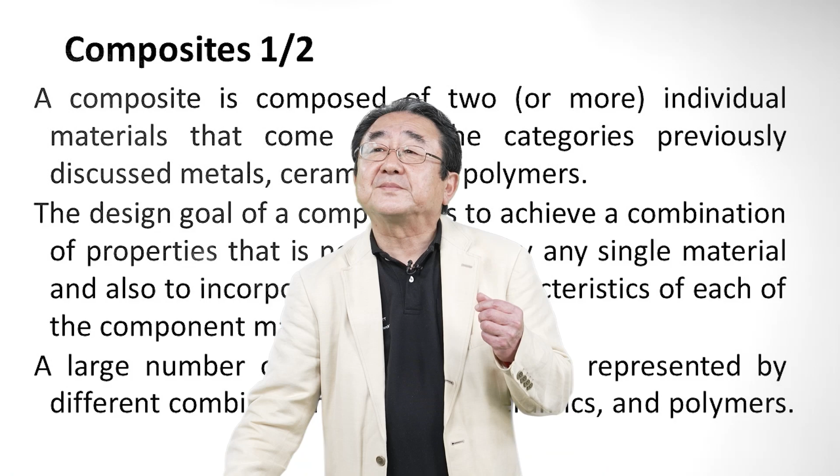So next, I will introduce the composite materials. Composite is composed of two or more individual materials that come from the categories previously discussed: metal, ceramics, and polymers. Composite has two materials mixed together: metal mixed with ceramic and polymers.

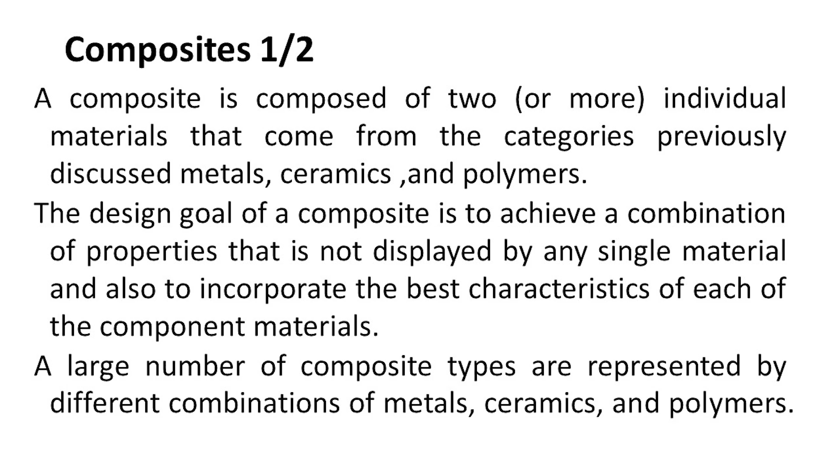The design goal of the composite is to achieve a combination of properties not displayed by any single material. Our goal in designing composite material is to create a new material system, with properties that cannot be realized by using any single material, and also to incorporate the best characteristics of each component material.

A large number of composite types are represented by different combinations of metal, ceramic, and polymer.

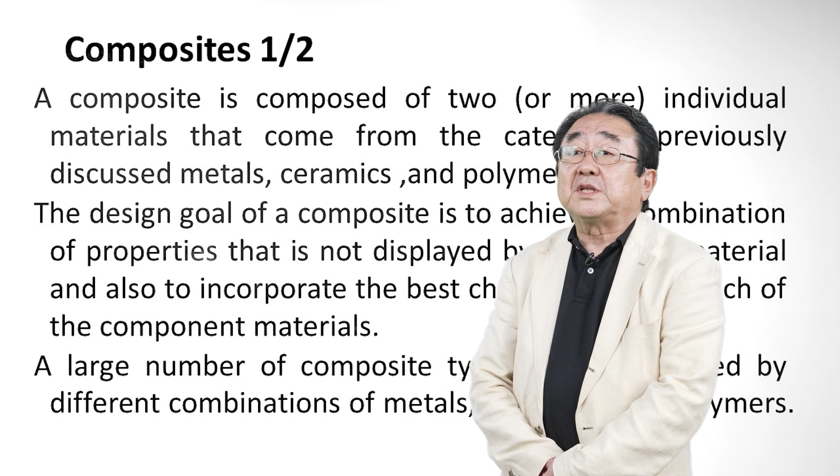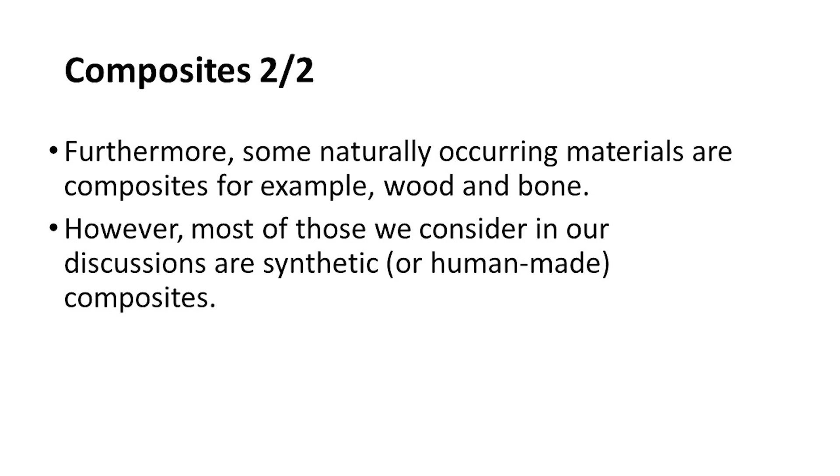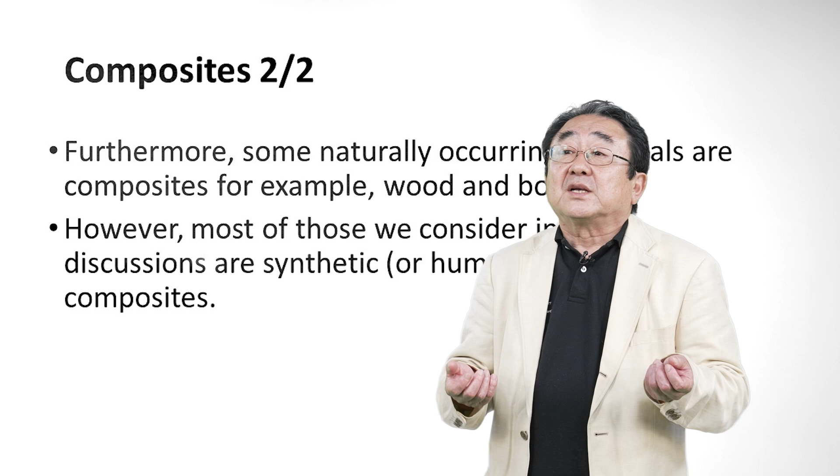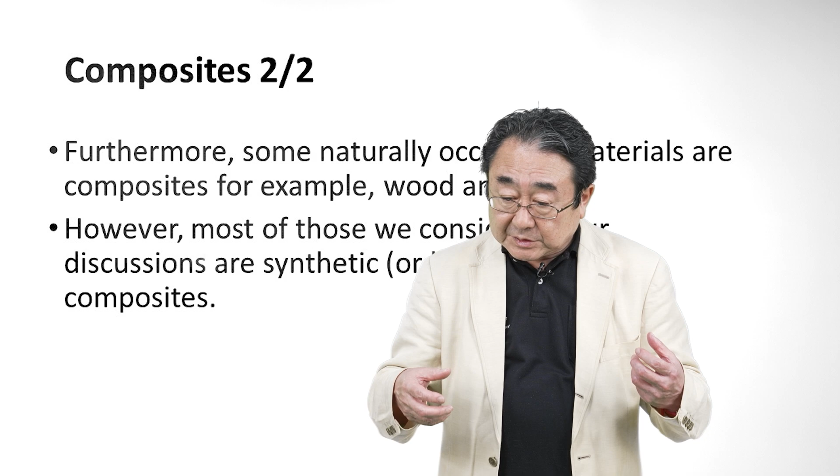Furthermore, some naturally occurring materials are composites, for example wood and bone. Wood and bone can be regarded as composite materials. However, most of those we consider in our discussion are synthetic composites. So in my lecture, I do not explain wood and bone as composite materials. I explain synthetic composite materials, or human-made materials. We can make composite materials, but we cannot make wood and bone - naturally we can only get wood and bone. So my definition of composite materials in this lecture is human-made composite materials.

Among human-made composite materials, there are several types of composite material systems. One is GFRP, glass fiber reinforced plastics. This is one of the most common and familiar composites, fiberglass, in which small glass fibers are embedded within polymeric materials, normally epoxy or polyester. The glass fiber is relatively stiff.

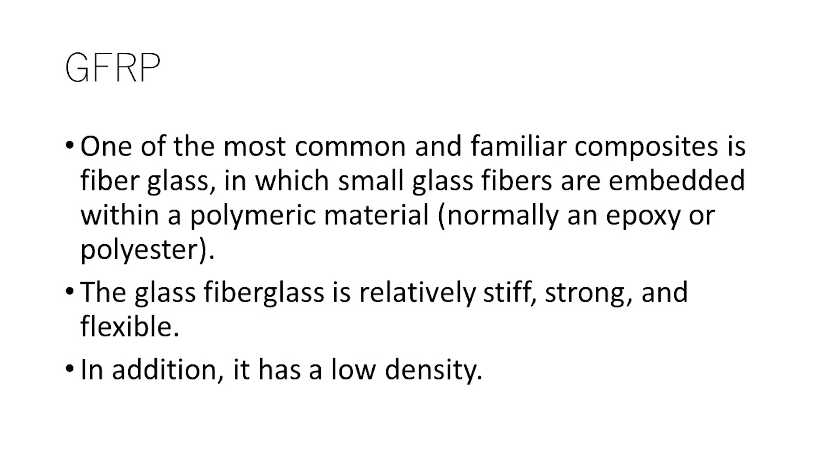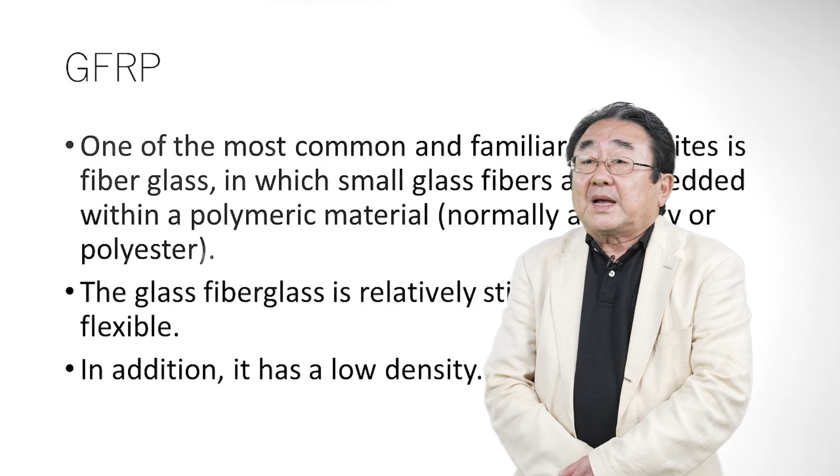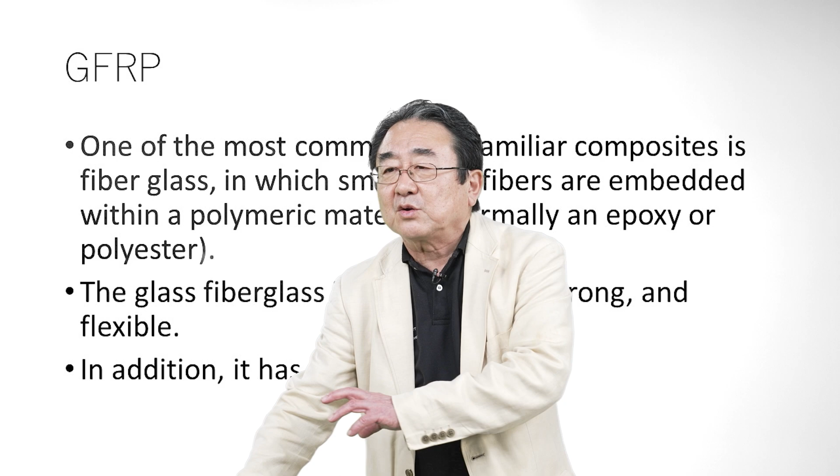Glass fiber is a ceramic material system, and ceramic has higher stiffness and higher strength than polymer. So relatively higher stiffness and strong materials are embedded in the polymer material. And GFRP has a low density. As I explained before about density: metal is higher, ceramic is lower, and polymer is even lower than ceramic, and composite is also low density.

Next is CFRP, carbon fiber reinforced plastic. Another technologically important material is carbon fiber reinforced polymer, CFRP composite. Carbon fibers are embedded within the polymer, as well as in GFRP. These materials are stiffer and stronger than glass fiber reinforced materials. CFRP has higher stiffness and higher strength than glass fiber, because carbon fiber has higher stiffness and higher strength than glass fiber.

But that is expensive. CFRP composites are used in some aircraft and aerospace applications, as well as high-tech sports equipment - bicycles, golf clubs, tennis rackets, skis or snowboards, and recently automobile bumpers. And the Boeing aircraft 787 is primarily made from such CFRP composite.

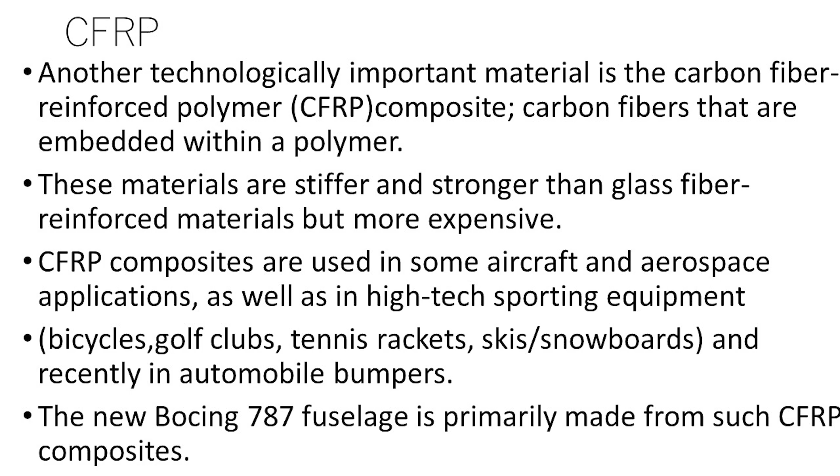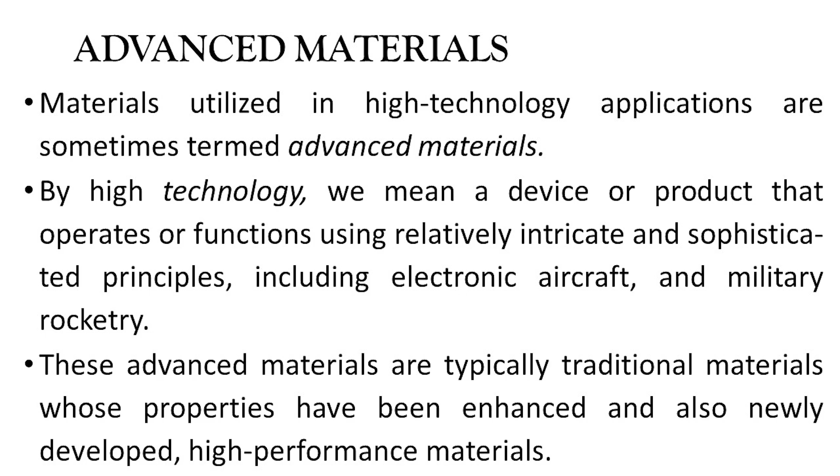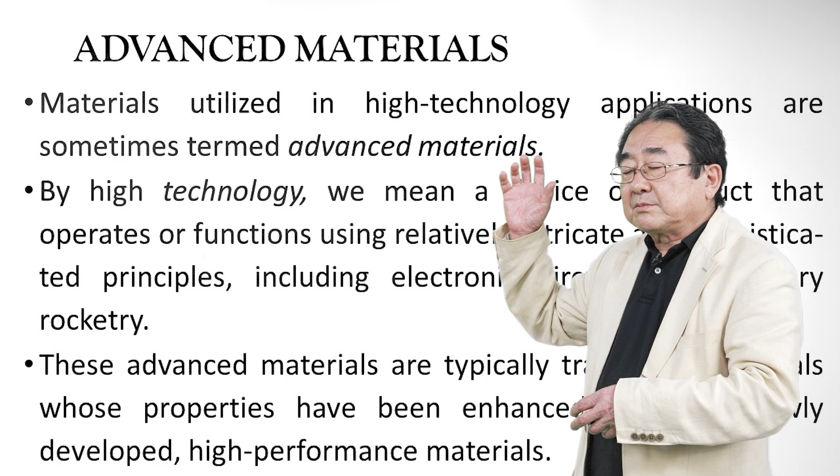So the materials are metal, ceramic, polymer, mixed together as composite materials, and next is advanced materials. Furthermore, they may be all material types - metal, ceramics, polymers - and are normally expensive. Advanced materials include semiconductors, biomaterials, smart materials, and nano-engineered materials. The properties and applications of integrated circuits, magnetic information storage, liquid crystal displays, and fiber optics are also good examples.

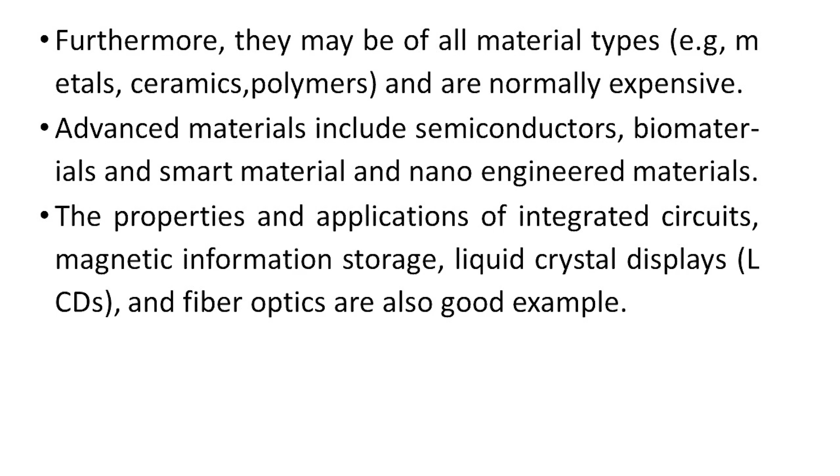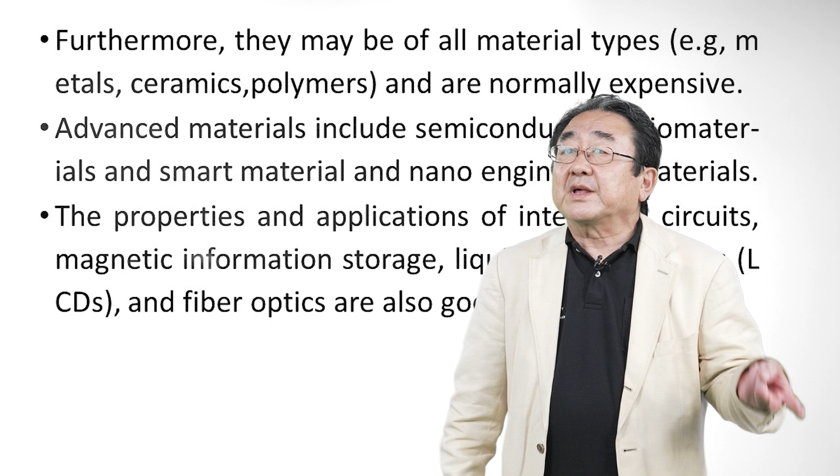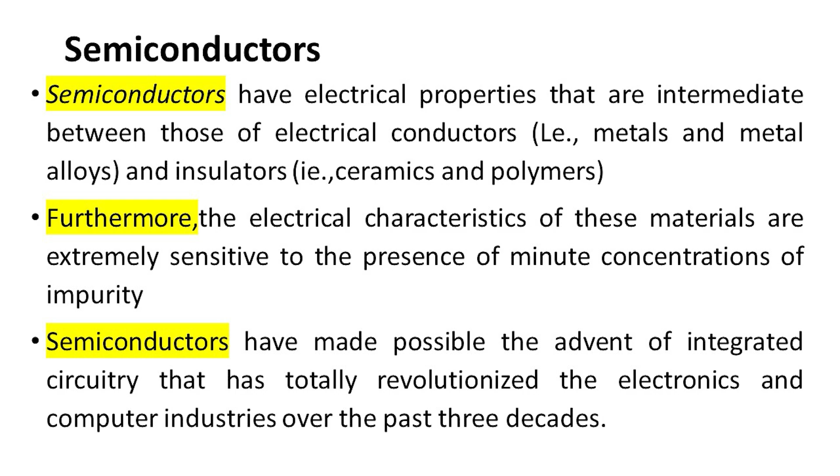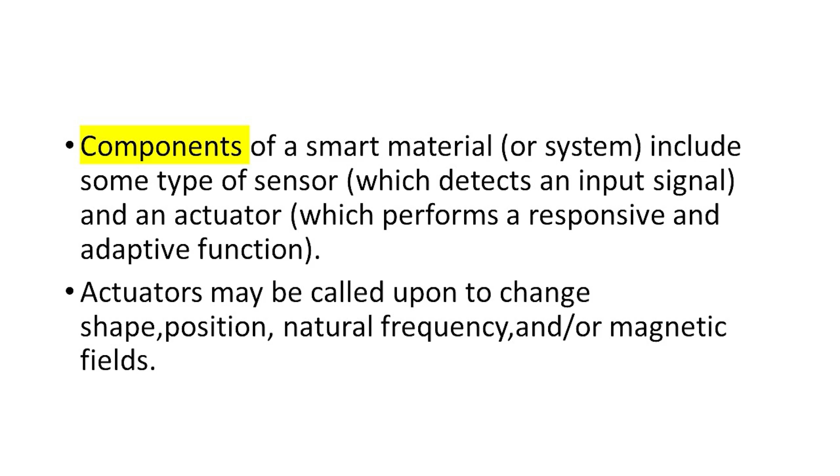So advanced material is not a metal, not a ceramic, not a polymer. All material types can be used in the advanced materials field, but they are a little bit expensive. Please remember these keywords: semiconductors, biomaterials, smart materials, and nanomaterials. These are materials in the field of advanced materials. Semiconductors, biomaterials, smart materials, and nanomaterials - please check these 4 material systems.

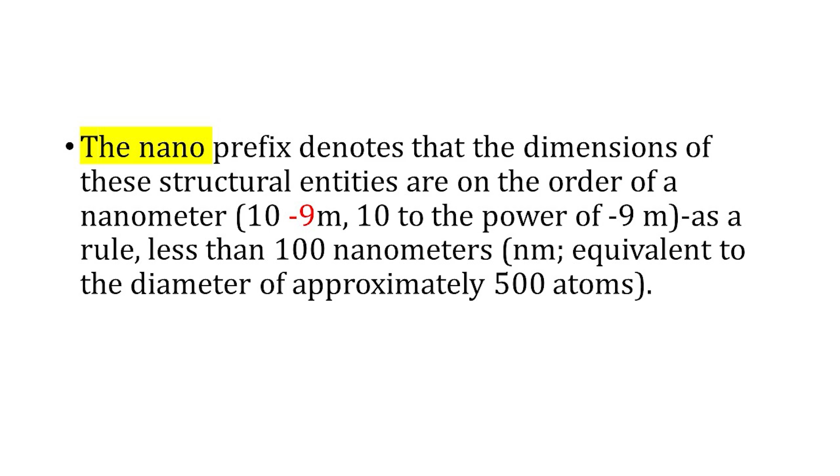But particularly in nanomaterials, the dimension of the structure is very, very small. So even if we use ceramic materials, if that particle becomes very, very small, that material system can create new performance. So that is an easy way to understand the nanomaterial system. These are explanations of nanomaterials.

Carbon nanotube, graphene - these are very attractive keywords in recent years. Nanocarbons, carbon nanotube, graphene - these are material systems from nano engineering.

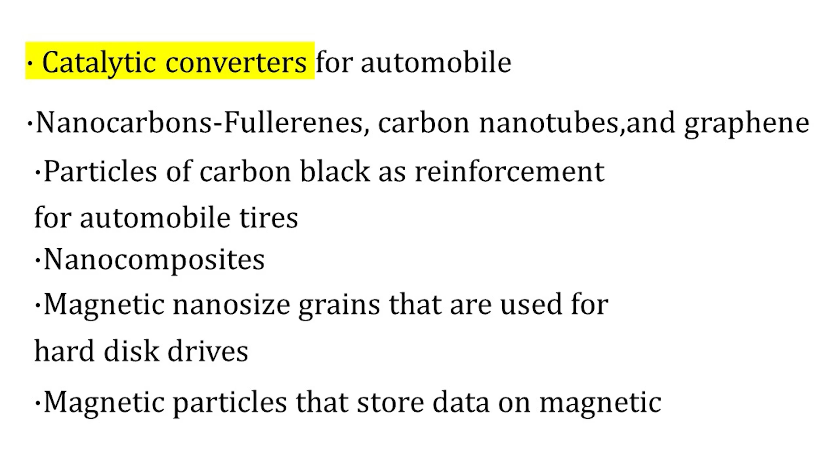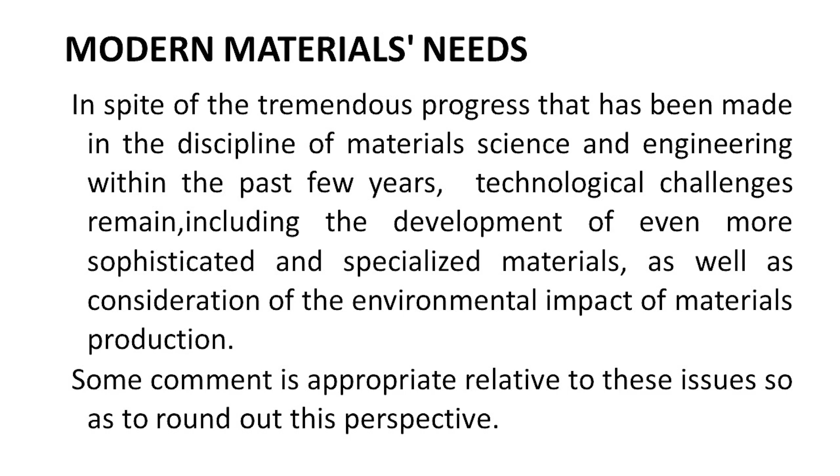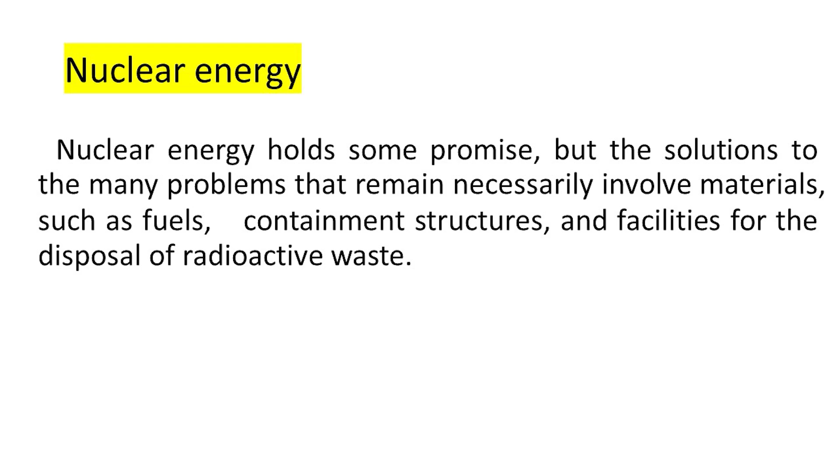And modern material needs - what do we need? What kind of performance or something is required of materials? One is nuclear energy - in nuclear energy applications, what materials can be used? What are they?

Next is energy transportation. Reducing the weight of transportation vehicles or cars, as well as increasing engine operating temperature, will enhance fuel efficiency. New high strength, low density structural materials remain to be developed, as well as materials that have high temperature capability for use in engine components.

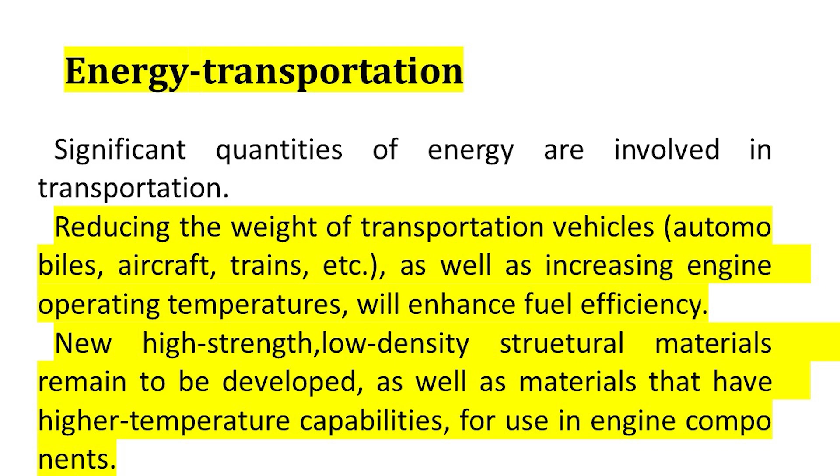So regarding energy transportation, we need economic sources of energy, and for solar power, to ensure viable technology, materials that are highly efficient in the conversion process yet less costly must be developed - lower cost conversion processes for solar power. What kind of material is effective or not?

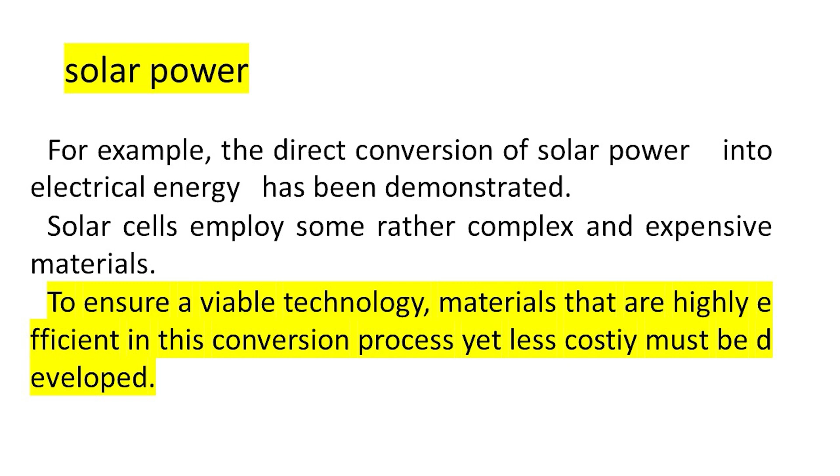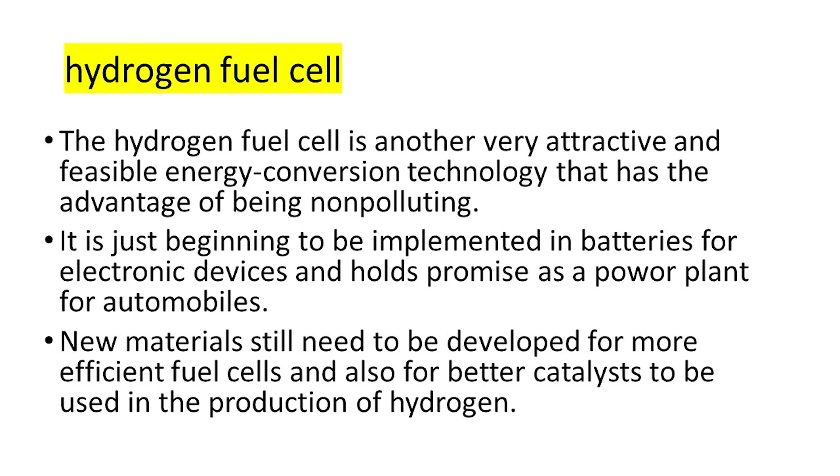Hydrogen fuel cell - that is also a very important keyword in our recent society and our future society. Pollution control technique - that is very important from the SDGs perspective.

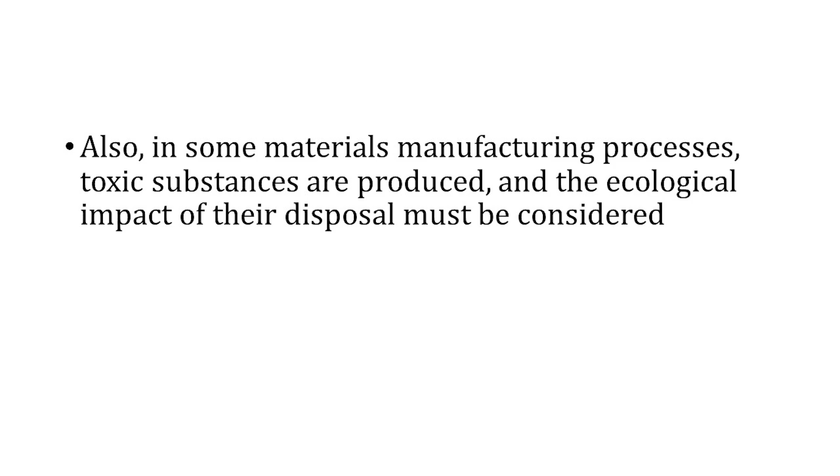Many materials that are derived from resources are non-renewable, meaning not capable of being regenerated, including most polymers, for which the prime raw material is oil, and some metals. These non-renewable resources are gradually becoming depleted, which necessitates discovering additional reserves and developing new materials having comparable properties with less adverse environmental impact, and increasing recycling efforts through new recycling technology.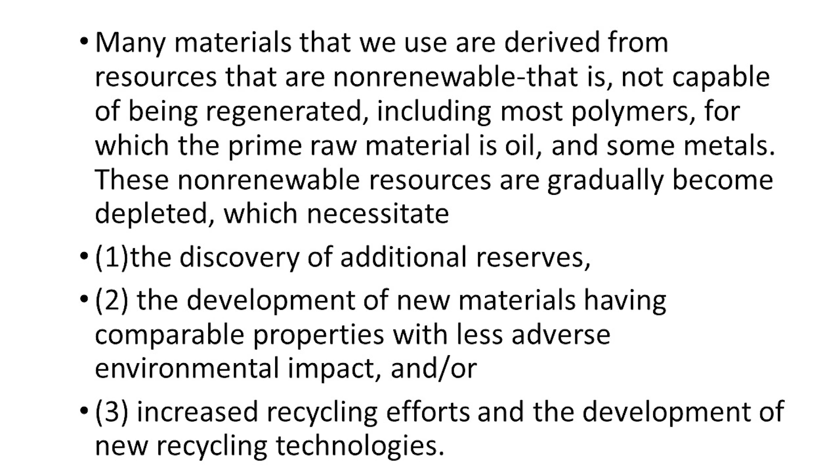These are very important messages from society, and we send these messages to material science and engineering to make new material systems, to develop new processing techniques - including processing technique, new material system, and recycling are important keywords.

So economics is important, lower price, but environmental impact is also very important. The role of material scientists and engineers is relative to these, as well as other environmental and social issues.

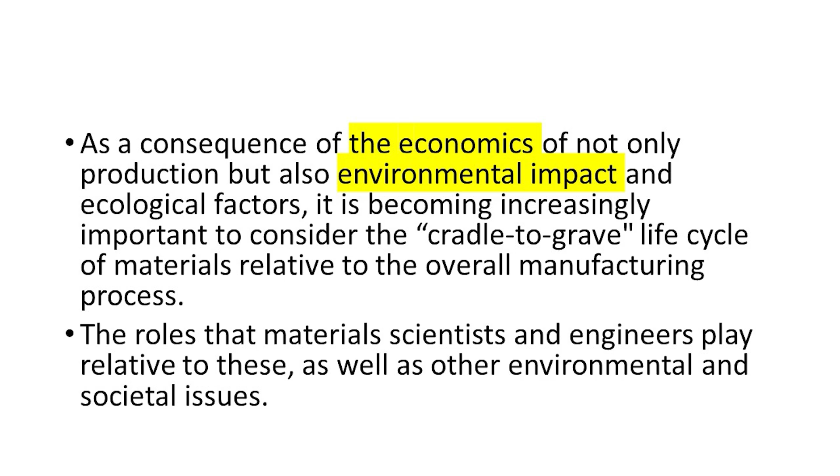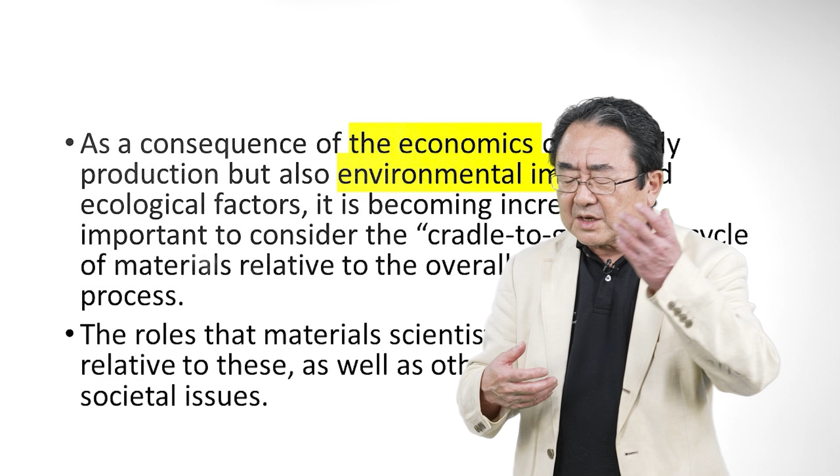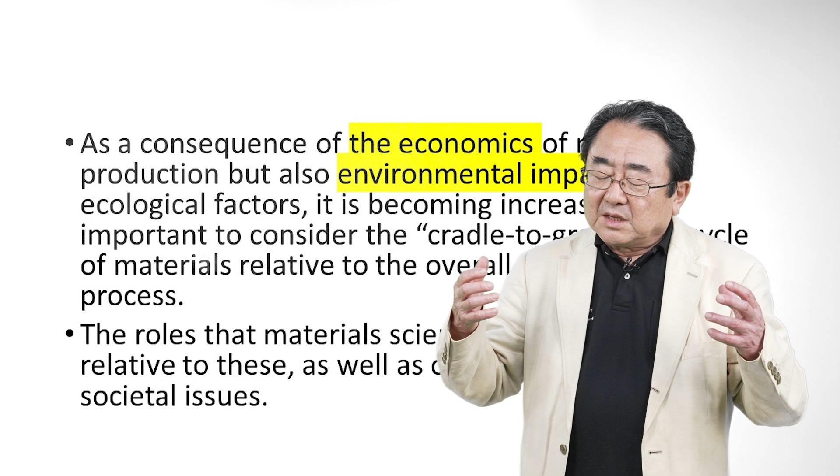So as I mentioned before, what does material science and engineering do? The selection of materials, and when we encounter a failure, we propose a new design system, a new material system, and a new processing system. Material science and engineers propose this, but plus, material science and engineers should understand not only cost but also environmental impact, and think about our society. That is the role of the material scientist.